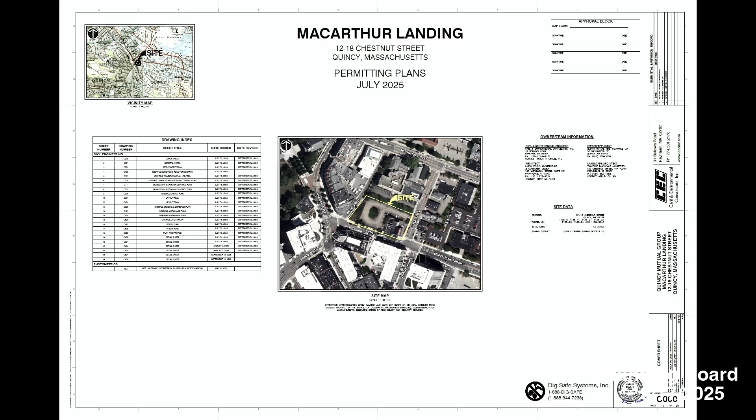Thank you. I just want to refresh my memory. I think it was Member Foley who mentioned this is the Quincy Mutual site that has the historic, or maybe not historic but historic-looking, original brownstone that's been in the city forever. There was discussion about whether that was going to be incorporated into the plan, and this is the one, right? We could forward the style to them. Are you talking about the proposed building or some of the existing structures there? The existing structure is the one Member Foley had talked about. And I think we were talking about whether that was going to be incorporated into the new project.

Stylistically it will be. None of the buildings that are there now will remain, but there will be walk-up brownstones that wrap the entire corner of Chestnut going up Foster Street. So you're carrying the look that is there now, but the original is gonna go away, and that look is gonna be carried into a masonry building, brick. I defer to the architect, but it is all stone materials, masonry, real materiality, brick, not the fake stuff. Yes. Okay, thank you. Alright, that's the building I was thinking of. It's a good looking building, I agree.

Mr. Foley, if I may, what I commented on last time was I thought it was fantastic how you carried that look of the brownstone throughout the entire project, side to side across Chestnut Street. It does look good, it is real brick, and I'm looking forward to this moving forward. And it's not just the look of the brownstone, right? It's actually usable space, those are entries to the walk-up units. Good point. Yeah, I think it pulls that history in nicely.

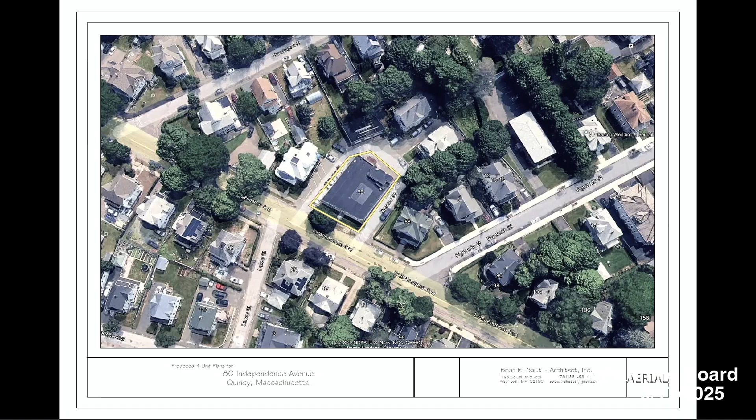So we're looking at an aerial here of the existing building highlighted in yellow, and it's slated to be demolished. The building fronts Independence Avenue, but it also fronts Parsons Street on three sides - on the right side, to the rear of the property, and on the left side. Parsons Street is also shared by three multifamily properties and a free-standing three-car garage. Plus, there's a single-family residence located on the right-hand side of the property - that's 88 Independence Ave.

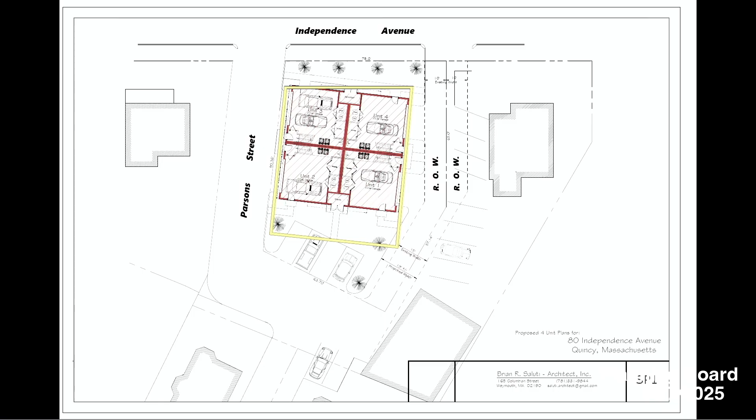This was made possible since the proposed building is substantially smaller than the existing building that's there now. This also allows for green space in the rear of the building, which there is none now.

So the typical ground floor plan unit, if you look at it, is basically a square - 27 feet by 27 feet, that's the footprint. In addition to the parking garage at this level, each townhome will have a mechanical room, a storage room, and there's enough area left over for rubber barrels, that sort of thing. There's also going to be a sprinkler room - if you look toward Independence Ave, you see it in the middle there. It's a small room, and that'd be easily accessible for the fire department if need be. Plus, each unit's going to have, as a safety feature, 2 egress doors at the ground floor level, and that's required by code, by the way I set these units up.

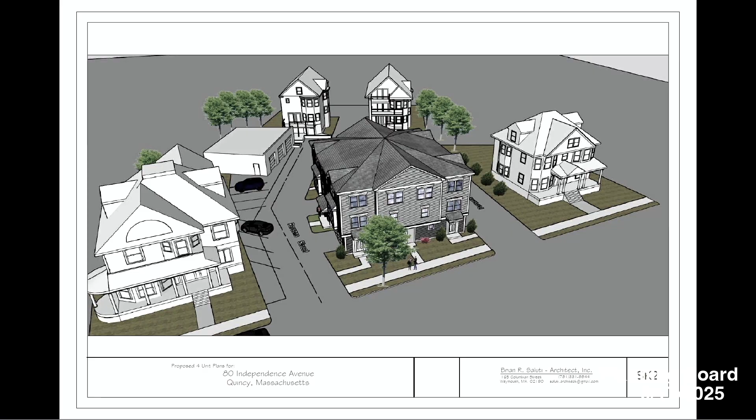Next sketch I'd like to show you is another aerial type sketch. This shows the right-of-way side of the project, which you see in like a dash line going down the middle of that drive. That's actually the proposed building's property line. Also note you can see the 3-car garage that's in the middle of the left side of this rendering, and that's associated with the 4-family out front.

Also note the combination hip and gable style roof that we're proposing for this building.

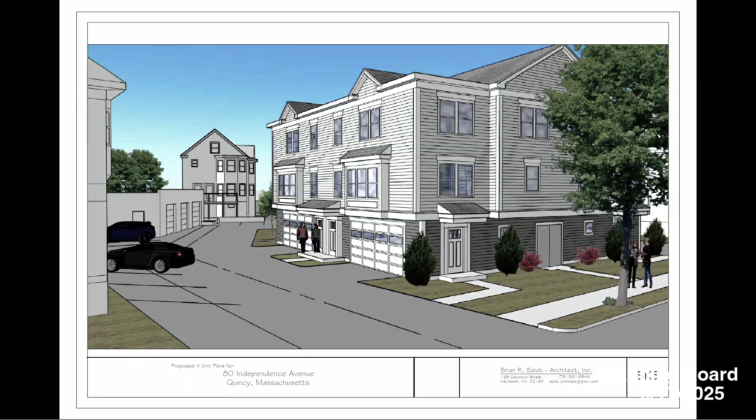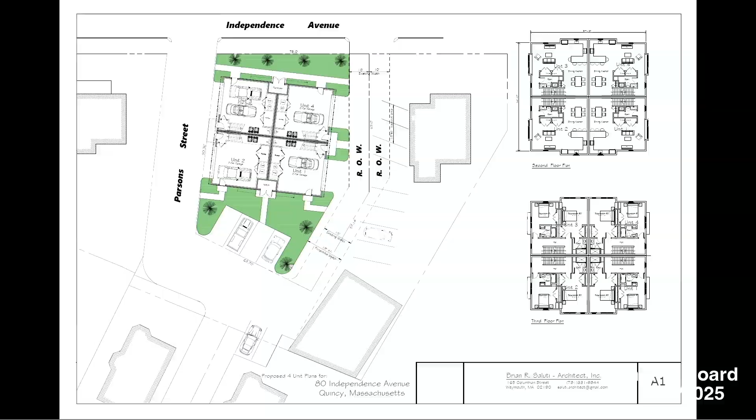So I'll show you the landscape plan. This landscape plan was prepared by Caren Gosslin. She's a landscape architect. The name of the company is CMG Design.

I'm not a landscape architect, but it's pretty obvious that there are 3 trees out front and 2 at the rear of the property. And she left me with some notes here. She explains that the 3 trees out front are cherry trees, and the 2 in the back are Japanese lilac-type trees. They flower in the spring, and according to her notes, they shouldn't get higher than 20 feet.

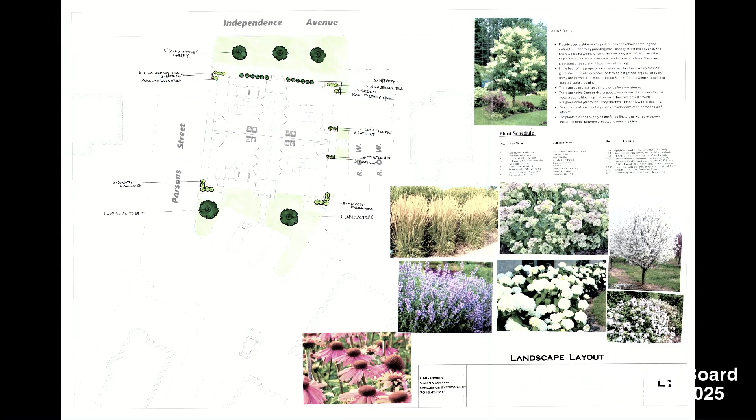There's also some open green areas, grass spaces at the front and rear of the property, which might be useful for snow storage. There's also going to be smaller plants like hydrangeas, perennials, and ornamental grasses, hugging the corners of the proposed building and at the entrances out front. That's basically a brief description of the building we're proposing.

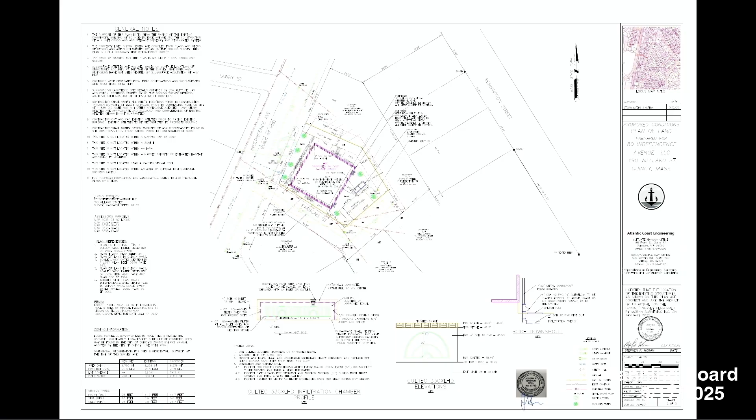I have a question. So on the utilities coming in, the electrical, is it above or below grade? Are you coming off a pole off of Independence Avenue? Exactly, we're coming off a pole right off Independence. That's denoted in red, and it says OHD for overhead. Okay, well instead of me looking there, I'll trust you. Yes, it's right here.

Is there any transformer required on the property for the 4 units, or is it just something on the pole? Do you need any ground-based transformers there? As far as I know, everything's coming off the pole unless something's detailed on Brian's plans that I'm not aware of. No transformer required. No transformers, and gas units, electric units, what's the plan? They're gonna be condos? Electric, as far as I know. So they're gonna be condos, gonna be electric? Yep, no transformers on the site. Right.

And looking at it, it looks like you're gonna have 12 parking spaces, is that right? Collectively, so I see 4 in the rear, around the corner. Yep. And then you have 2, 4, 6, 8 in the units, right? Correct, yep. So you got 12 parking spots for 4 units?

And the front of it, on Independence Avenue, you're showing a door with no windows, and there's a walkway going there. On the backside I can see it has decorative doors, but the front on Independence you're not showing a very decorative door there, it almost looks like a utility door. Is that the sprinkler room? Correct. Yeah, for safe access. Ugly door, but the doors to the left.

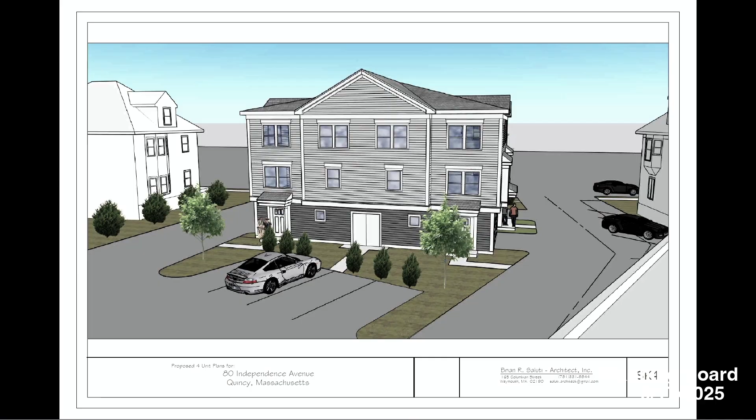That's the view. There's entrance and egress doors on either side, and in the middle that's for the sprinkler room. On both sides of the building, you have the sprinkler room with an entrance. Wait, am I looking at the front or the rear side?

That would be the entrance. Both sides of Parsons would be the main entrance, because of where the garage doors are. Gotcha, thank you. I just wondered what those doors were, I didn't know what they were.

Any additional questions? That's it for me. Member Foley? I was looking- we get Member Foley confused all the time, don't worry about it. You said that earlier, Attorney Foley. Well, you both look like twins, guys. I know, right? Schwarzenegger and DeVito.

I just wanna make sure your presentation- yeah, there's one more thing I wanted to add. What this is gonna provide, for some reason people think when there's an unoccupied building, it's just an area they can throw all their trash. So if you go by this building, the owner tries to upkeep it, but every time you go there, there's littering all over the place. By switching over to these residential units, that's gonna eliminate all that. It's gonna upgrade the property, make it look a lot better in the neighborhood, and eliminate the littering as well. Thank you.

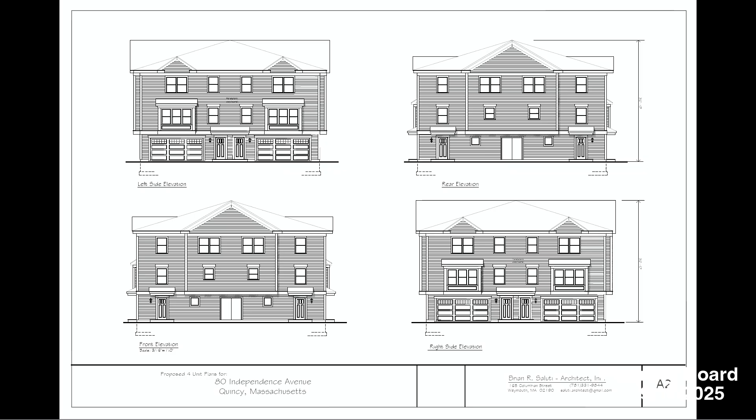I get it, it's a utility door, sprinkler room, utilitarian, but he's right, it doesn't look good. You've got some pretty handsome pedestrian doors on either side. Maybe just on the front, put the lights in, the windows, just mimic those doors, even though it's a sprinkler room. It's a busy street, so it would just look nice.

Sure, absolutely. And one other thing, I like the proposed storage for snow in the rear. It does have city street signs on it. Is that plowed by the city of Quincy, all the way around? Yes, when it comes around to the right of way? Yes.

Okay, alright. No, I hadn't thought of the doors, Ellie, until you mentioned it. I agree. And since you just said that, I just thought of something too - if it's a 4-family like this, or 4 units, are they required to get private rubbish disposal?

Yeah, that was actually something I wanted to jump in on too. So that will all be- they're gonna be responsible for their own trash. They have garage space to keep a barrel, they'll put it out on trash day and put their own barrels out. And the city will pick it up then? Yes, it's not required, but it's a small enough development that that's what they'll do. It's great. Okay, thanks, Pat.

So I do have a number of questions. The street tree that's out front on Independence, is that going to be maintained? Yes. Okay, 4 condo units, so you said they were going to be owner occupied - is there going to be a provision in the documents providing that they cannot be rented out? Yes, yes, my office will actually be doing the condo docs as well, so we'll make sure of that.

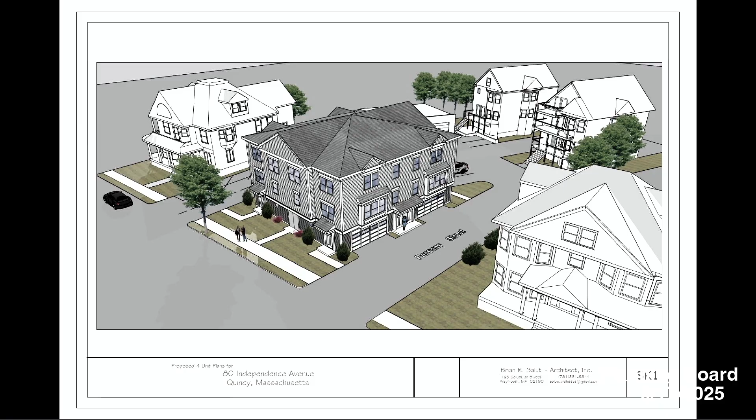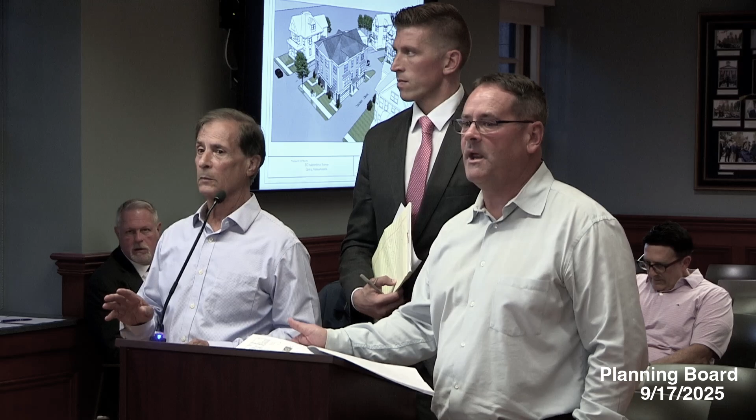Okay, alright, so I'd just like to see some consideration given to that visibility issue. Sure, yep.

I had the same question about disguising sprinkler doors up front. I also have a question about the property boundary, specifically relative to the northern right of way. You're showing 10 feet of the right of way being included in this lot. Does the lot include the 10-foot right of way, or are you claiming some private right of way under the derelict fee statute? The way we've laid it out is in line with the deed, which goes halfway across the right of way. The blue line is basically halfway across it in terms of width.

So that lot, it's not like you've extended the lot lines to take in part of the right of way that you would own? No, that lot exists as is. Okay, but then who has rights over that right of way? I don't have a copy of all the deeds for the abutters, but I know this property does, and the abutting property to the left, the 4-unit building.